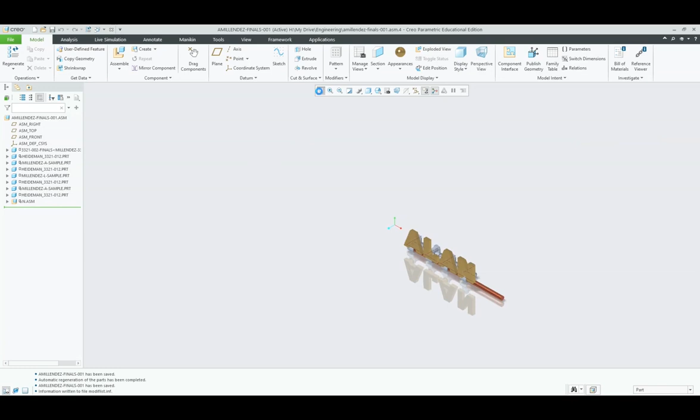This is what we are going to do for our finals. We are going to assemble our name in Creo, and we will create each of these letters as a part, and we will assemble them using the assembly feature in Creo.

So for our finals, you will have to do your name or your nickname, and you're going to need to do three unique letters. So if your name is Alan, you will have to do letter A, letter L, and letter N. If your name is Bert, you have to do letter B, letter E, letter R. Okay? You can do the fourth letter or fifth letter if you have more time, but the minimum would be three unique letters.

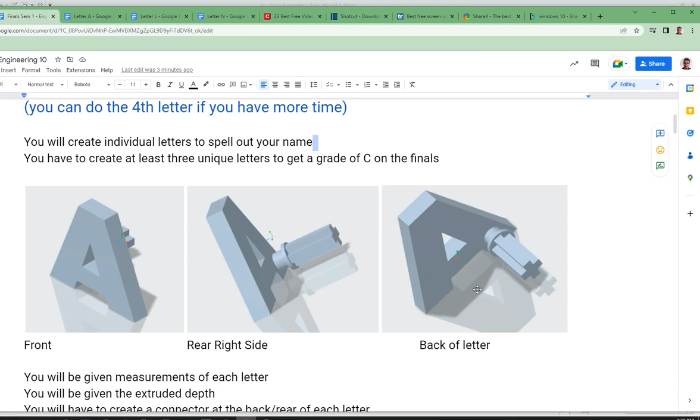Okay? So when you do your letters, you will have to do them in 3D, and you have to put a connector at the rear right side. So rear meaning back, on the right side, you must have this. So here's the back of the letter. If you look at the back of the letter, this is the right side, and that's where you're going to put the connector.

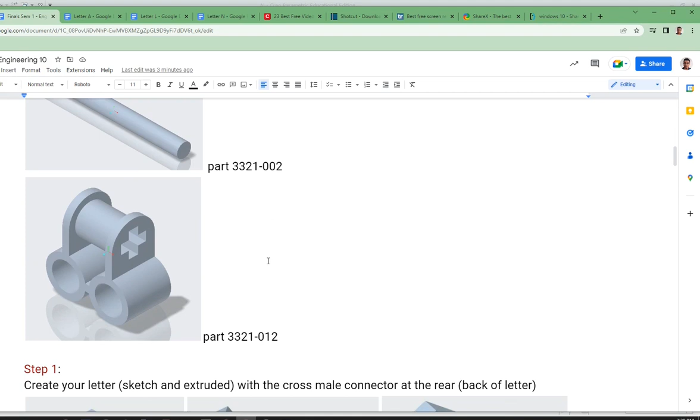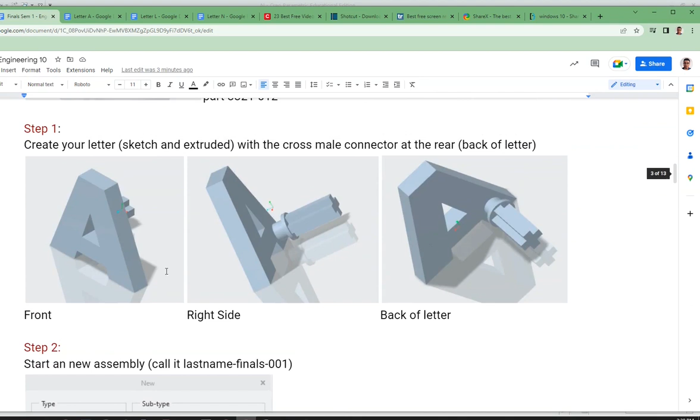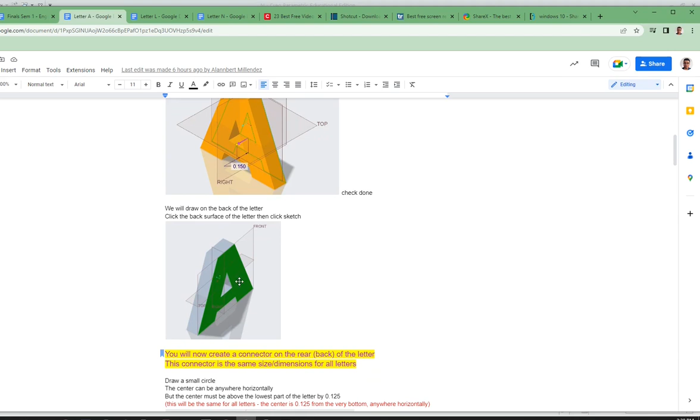Okay. So for your letter A, I gave you all the dimensions that you need to construct letter A. You will have to extrude that to 0.150. And then when you're done, you're going to use the rear side. So this is the back side of that letter. And on that back side, you're going to create a sketch, and then you're going to create a circle with a diameter, not a radius, but a diameter of 0.15. The center of that circle is 0.125 from the very bottom of the letter.

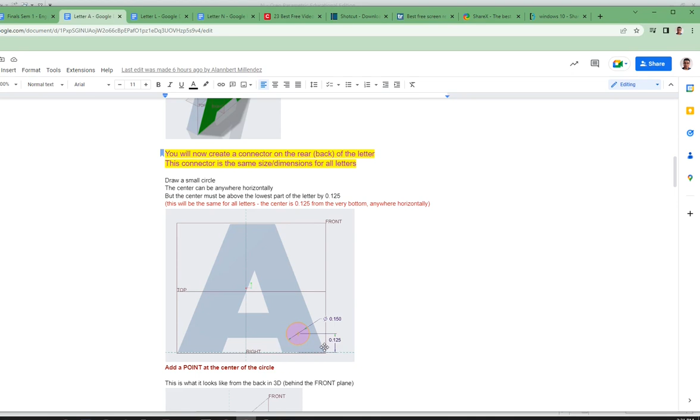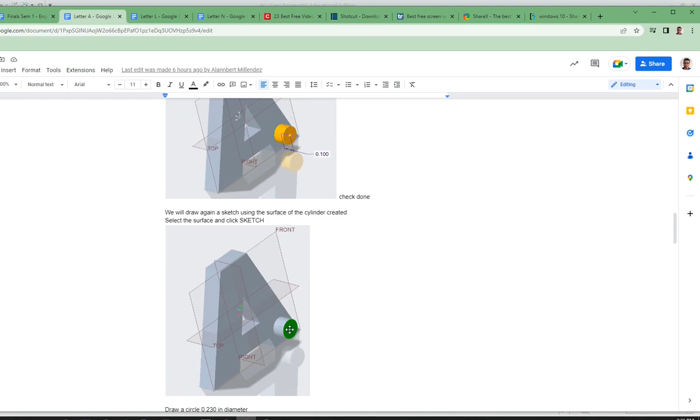At this point, you will also put a point at the center of this circle. And then once you have that circle and that point, you will extrude that to a 0.10. Okay. And then you will select that face after the extrusion. You're going to select that face so that you can do another sketch, and you're going to draw another circle that's bigger. The diameter, not the radius, but the diameter is 0.230. So it's bigger than your first circle, and you should be using the same center as your first circle.

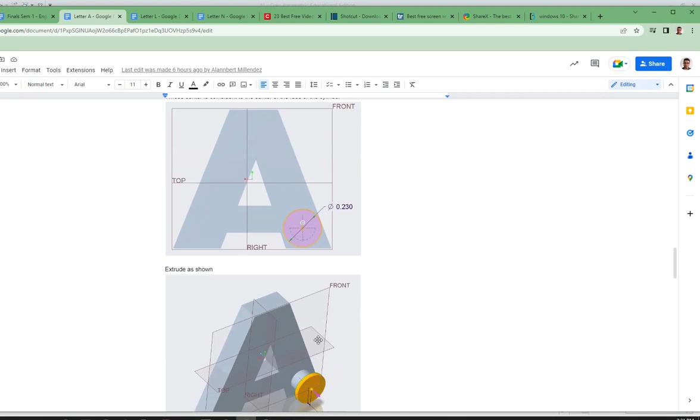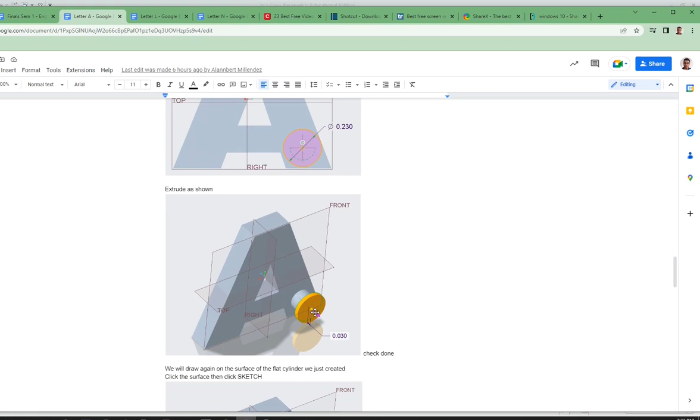Okay, so now you're going to have that second circle that's bigger, but you're only going to extrude that to 0.03. So the first smaller circle is longer, and then this one is shorter, so it's a flat image. And then after you've done your extrusion, you're going to now select this new face, and then you are going to insert your cross. So the cross section that we did back when we did all our parts, you will do that again. If you don't have that, then you have to draw this cross.

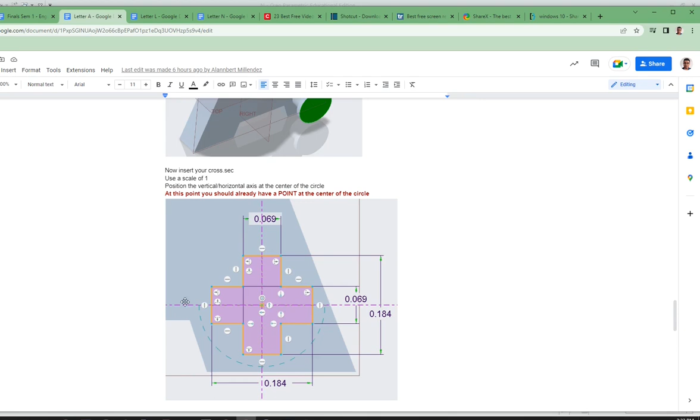Here are the dimensions. Make sure that the axis of the cross, the center of the cross, is at the center of that last circle we did. And then you're going to extrude that to 0.40, and that's what you're going to have. And then you're going to check your volume if you got it correct. Okay, so if the volume is correct, then you did everything correct. And then you will now go to your next letter.

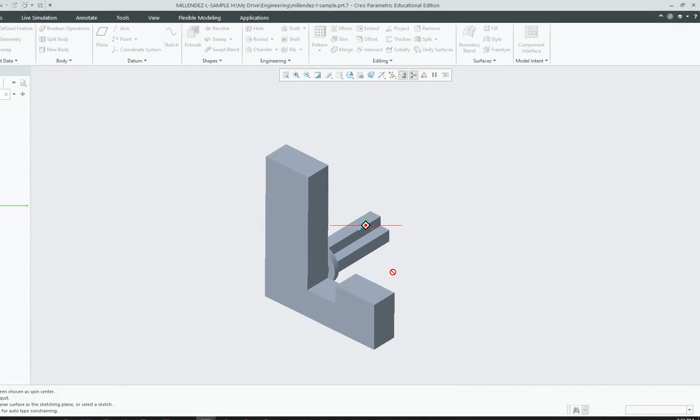Each letter will have to have this connector. Okay, so if your next letter is letter L, then you're going to have letter L also with a connector on the rear right side. Okay, there you go. If your next letter is N, then again you have your letter N, and then you will have your cross connector. Okay, so that's the first step.

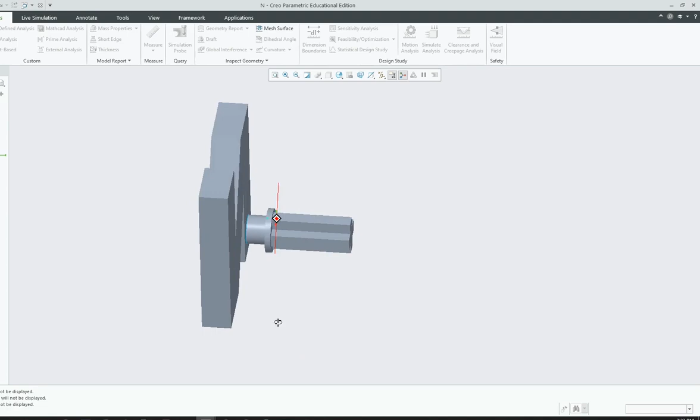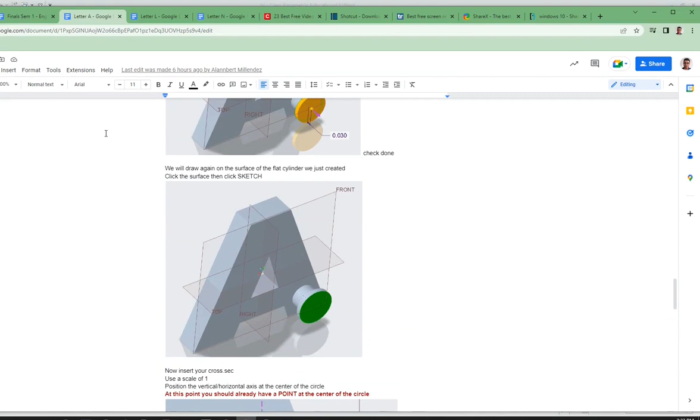You're going to draw or create a 3D of each of the letters. Minimum is 3, and that's gonna give you your passing grade. And then we're going to assemble them after we're done. Okay, so I have given you the dimensions for your letter A. If your next letter is L, you also have the dimensions for letter L. You're gonna extrude that again.

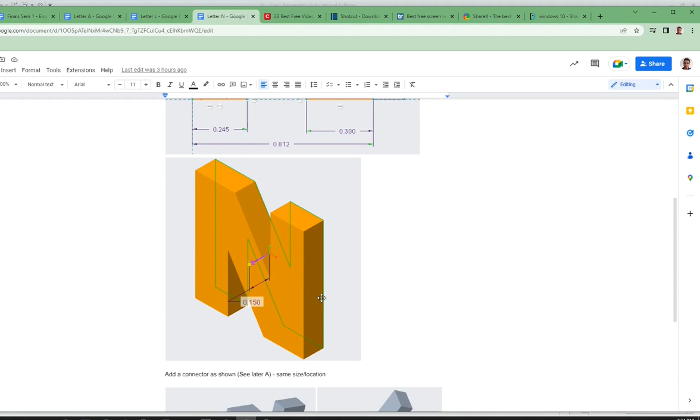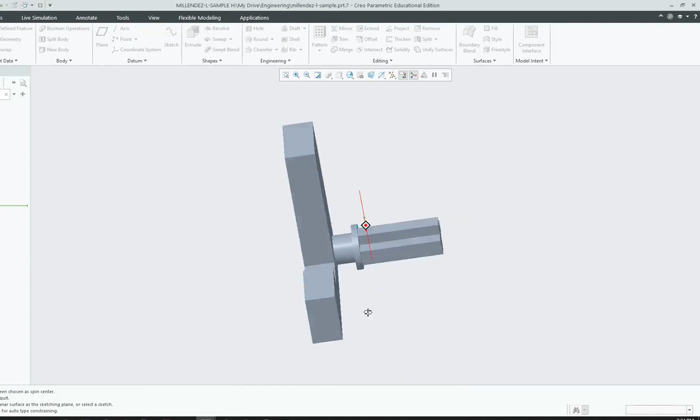And letter N, I'm going to give you the direct dimensions for all the letters, the minimum dimensions. You can create them, and then you should always put a connector on the back, rear, right side of each letter. Same dimensions as you've done for letter A, exactly the same. So all of the letters will have a connector. That's for letter A, letter L, and letter N, minimum of three.

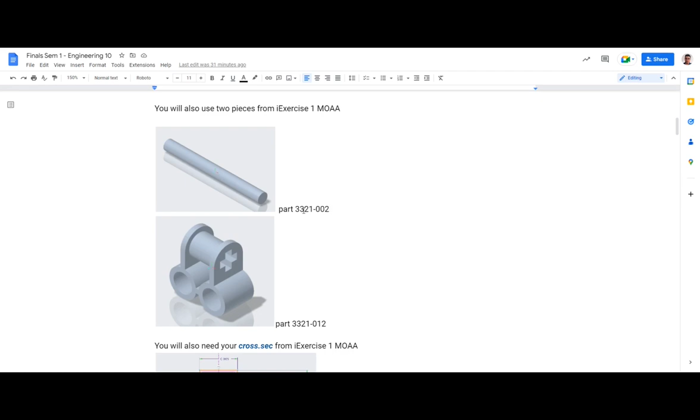Just to follow up on that one, we are going to use parts from our iExercise one from the MOAA, part 3321-002 and part 3321-012. We will also use cross.sec, which is one of the first sections that we did from one of the very first parts that we did in iExercise one.

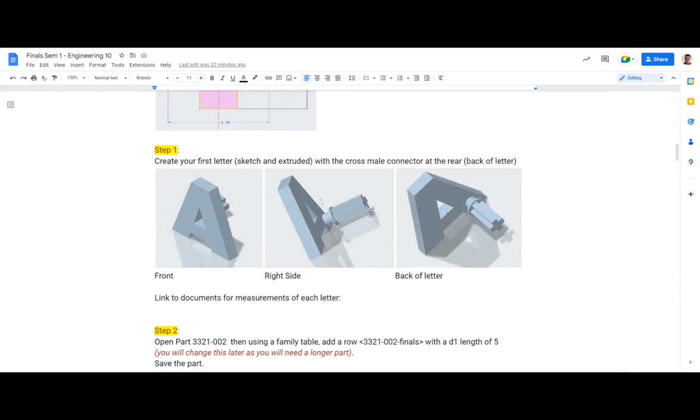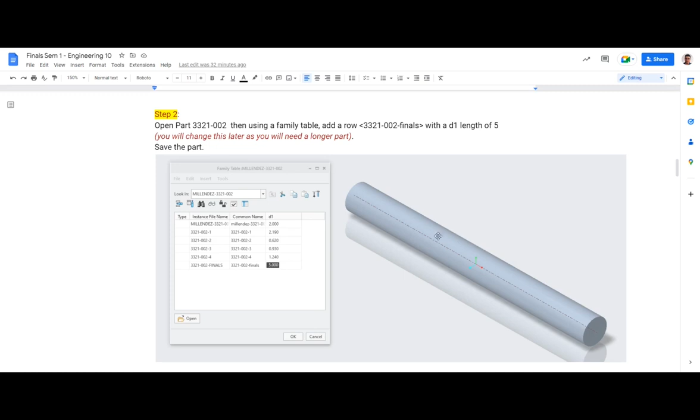So again, you're going to create your letters, put a connector, and then you will open up part 002, and you will create a new row using family tables, assign that row a distance of 5, and you will go back because 5 may not be enough for your name. So you're going to create a new assembly.

Make sure it says assembly, and you name it using your last name dash finals dash 001. The first part that you're going to add is part 002, and you're going to use that new family table row that we created.

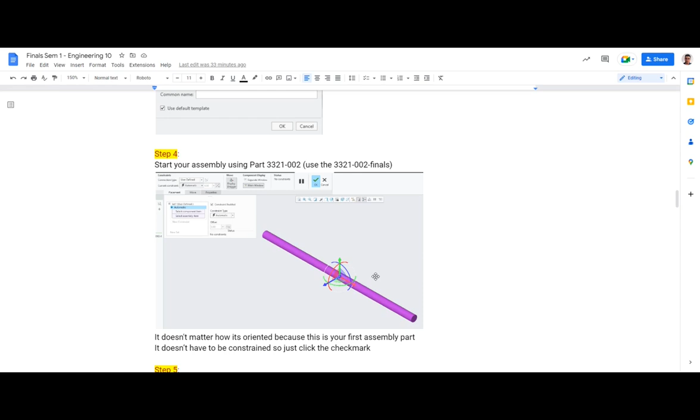It doesn't matter where you orient that, because that's our first part. So all you do is click the check mark, and then you're going to add a new assembly.

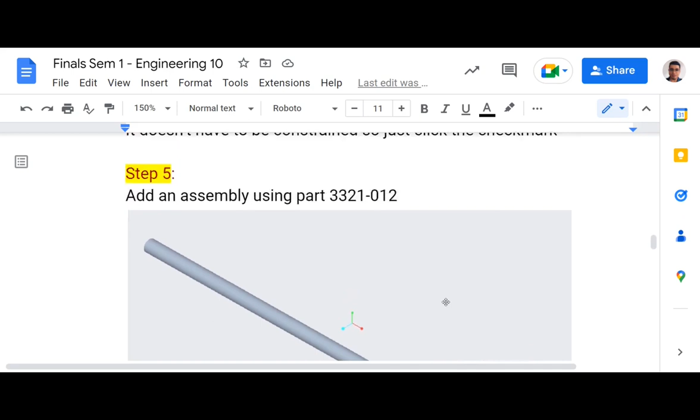You're going to add your 012. So 012 would be your connector from what we did on the MOA or the assembly. So that's 012. After that, you will align that to the left end of the 002 part, the rod.

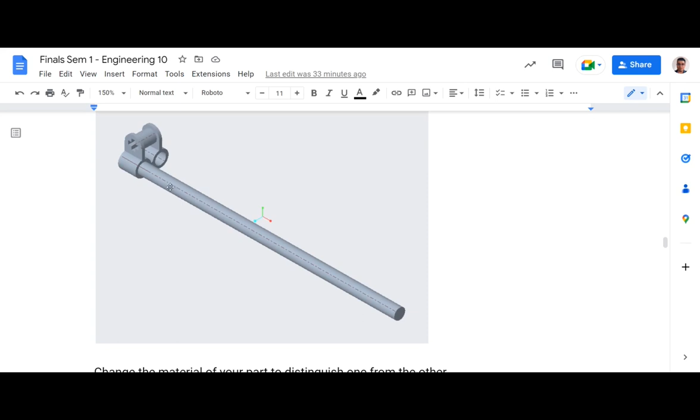And then you can actually change the color of this material by going through the appearance and then selecting a color from this list. Let me show you how.

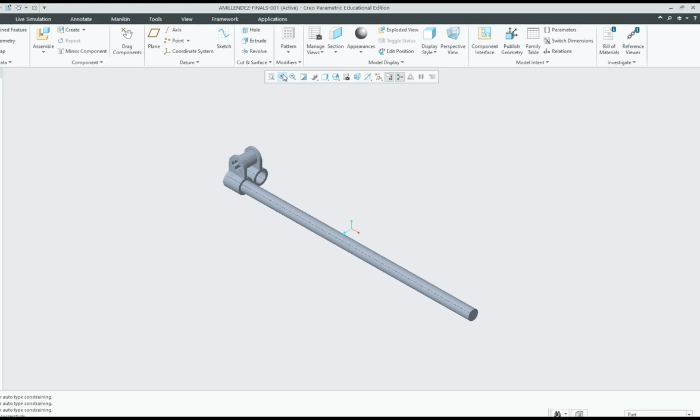Now you can see that the parts are aligned. So if you zoom closer to this area and turn that around, you can see that part 02 and part 12 are aligned.

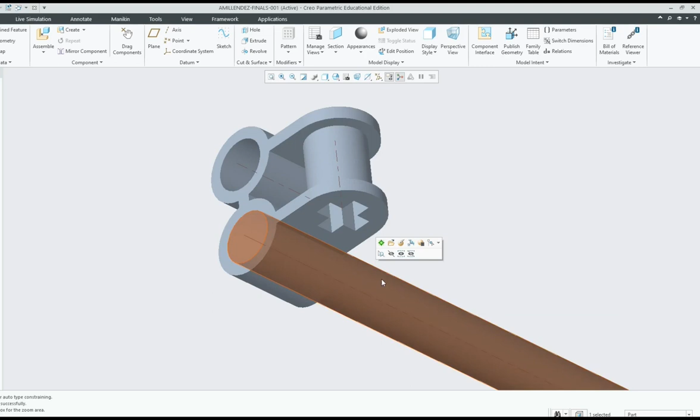Also, you can change the appearance of the parts by putting colors on them. To do that, you change your selection to part. Select, let's say, the rod or part 002. And then over here up on the ribbon, there's appearance.

And then you can select your own colors here. For example, let's select this one. And then it would now change color. You can see the difference that they're aligned, it's flush in the face and everything.

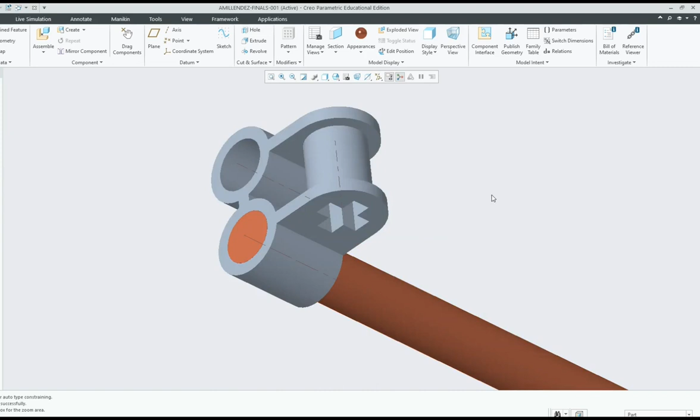You can also change your view from standard shading to shading with reflections, and it should just give you a more realistic effect of your part.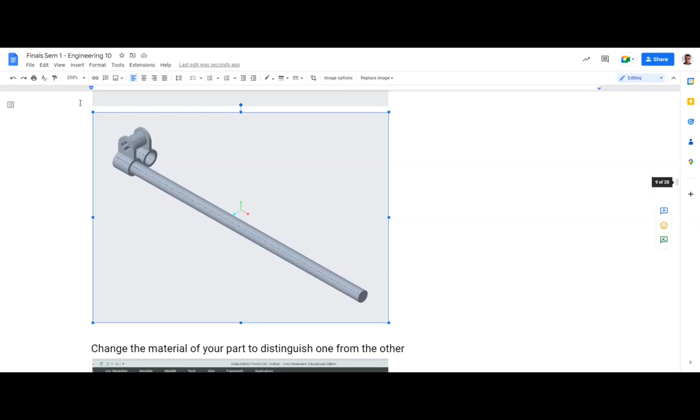Once you have changed the appearance, go ahead and click save, and you're now ready to go to the next step, which is adding your first letter.

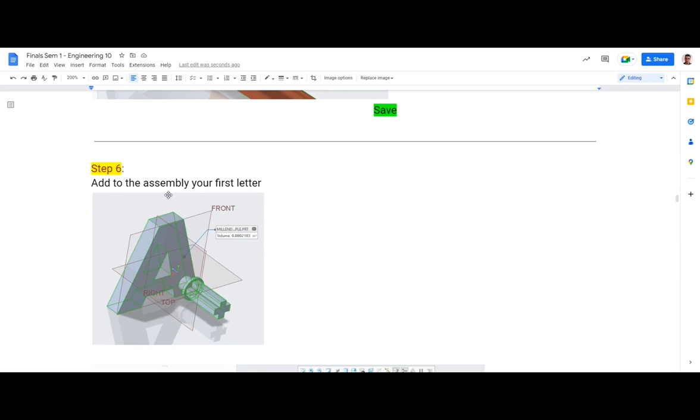In my case, this was going to be the letter A, and remember that the letter A and all letters have a correct volume depending on the letter, and it has these connectors found on the right rear of each letter.

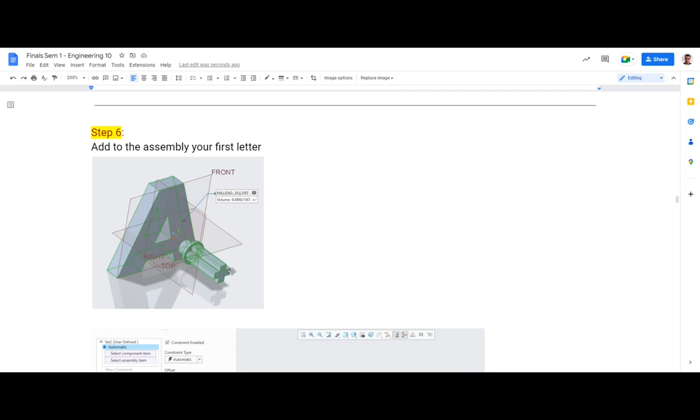When you place it in Creo, you have to place it and put constraints so that the connector will align to the cross hole of part 012, 3321012. This is actually the essence of the finals, is to do your assembly.

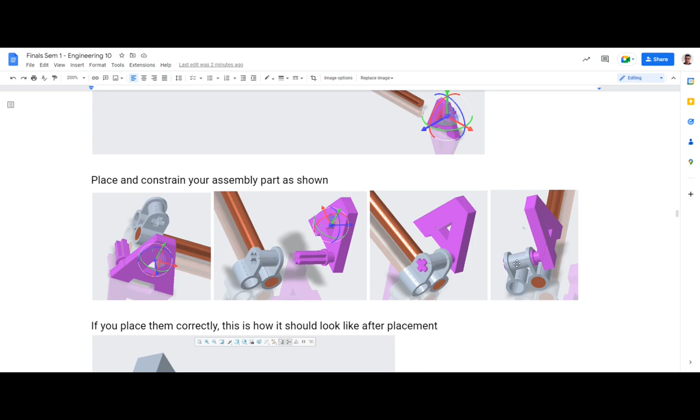So connect it and then make sure that it inserts correctly. There will be an extra piece sticking out, and the 012 3321012, this gray piece, and the letter should be flushed on this surface.

And when you place them correctly, when you check the green check mark, this is how it should look like. You can change the appearance again, just like I showed you before. And the last thing you should be doing is checking for a global interference check.

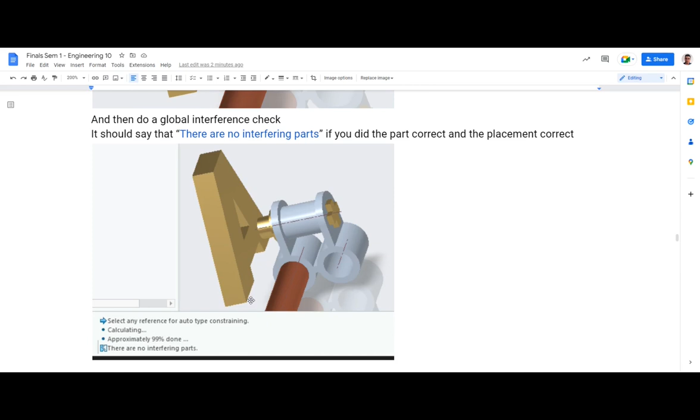It should say in the lower left corner that there are no global interferences, or no interfering parts. When you confirm that, you can click save, and this is how it should look.

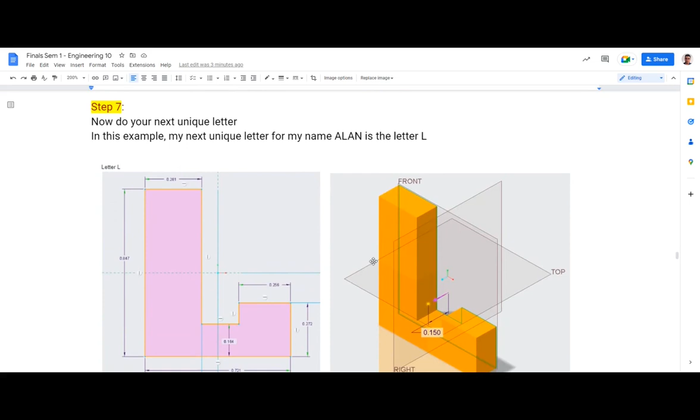The next step is to create your next letter. In my case, it's letter L. I'll give you all the measurements for each letter. You extrude that letter again, and from the right rear of each letter, you create the connector just like you did for letter A.

Now, there's a circle on this connector, and the center of that circle is always going to be 0.125 from the very bottom of each letter. That's always the case.

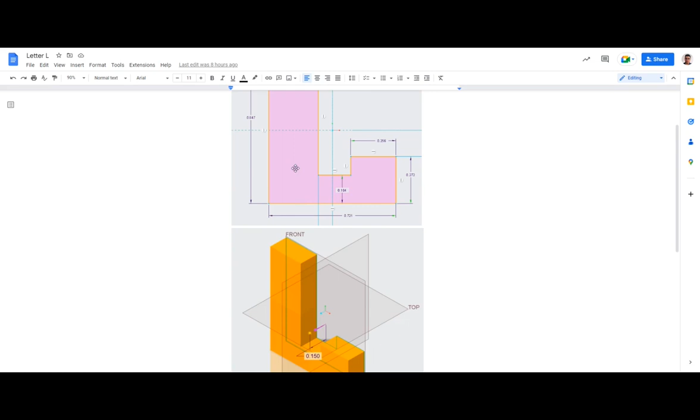It doesn't really matter where the circle would be on the left and right, but the circle on the rear face—not here, this is the front face, so the rear would be here—it should be 0.125 from the very edge of each letter.

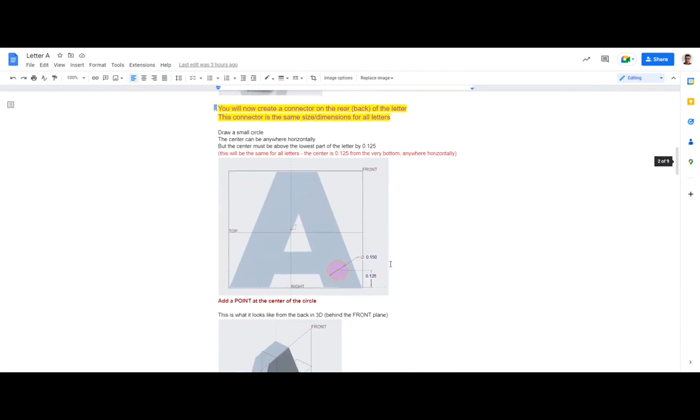I showed you how to do this on letter A. You have to draw a circle on the right rear side, then put a point. You can see the circle and the point are 0.125 from the very bottom of the letter, and then you extrude that again to 1.0.

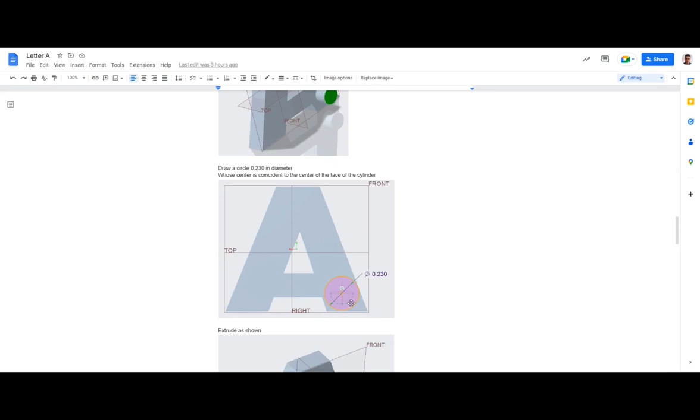Then you create a new sketch using the surface of that extruded cylinder. You create a new circle with a diameter of 0.230—diameter, not radius. They must be concentric, using the same center. Then you extrude that.

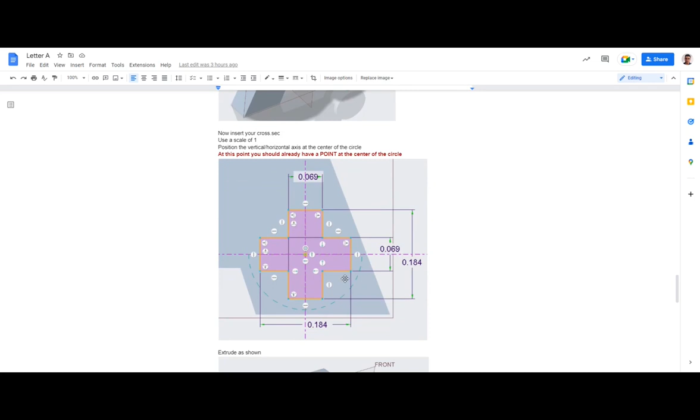Extrude to 0.03. Then you create your next, or last, sketch using that surface, and import your cross section, or draw it again if you don't have one, and extrude that to 0.40. Then when you click OK, you can check the volume.

That's how each letter should be. So now you're done with your letter L.

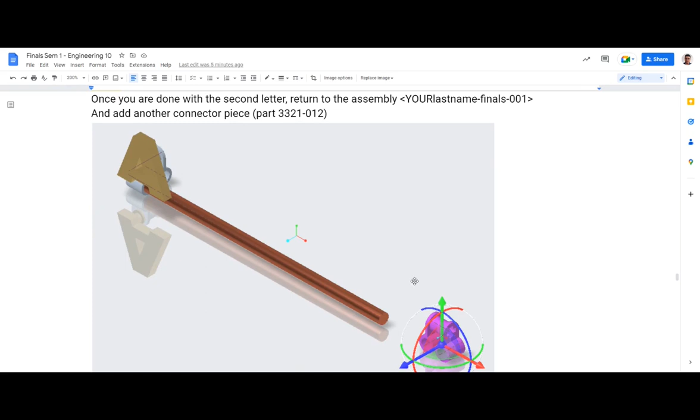When you're done, go back to the assembly and place not the letter first, but another part, 3321012, which is this connector, and do some placement and constraint. For now, you can just put it anywhere in the middle of this rod, which is 3321002. Once you have it there, the next step is to add your letter.

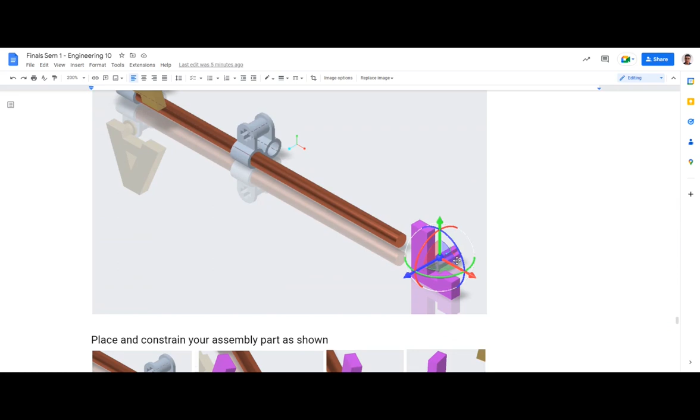Remember, there's a connector here. You'll put this letter and use the back connector to put it in this hole. You can move it here, do some constraints so they're aligned, and then have it flush on the surface, with something sticking out in the very back end.

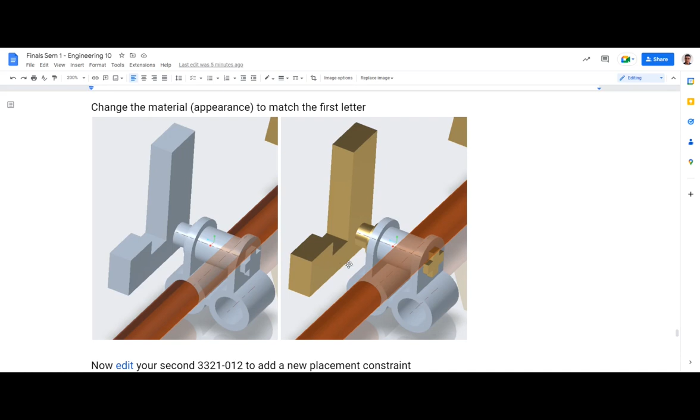When you're done, you can change the appearance again, just like we did with letter A. Now, because we placed this connector in the middle of part 002, which is this brown rod that I have here...

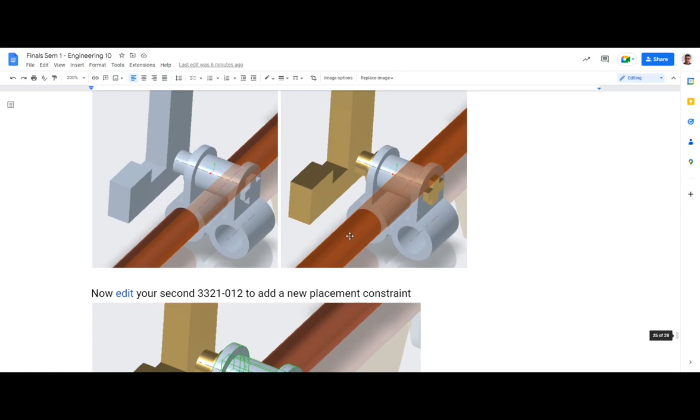You will have to edit the definition of 012, and this letter L, or your second letter, will disappear temporarily.

As you put a new constraint, you want to use the inner surface of 012 and the edge of the first letter—in my case letter A—so that they have an exact distance of 2.0. You want the distance between this surface and that one to be 2.0.

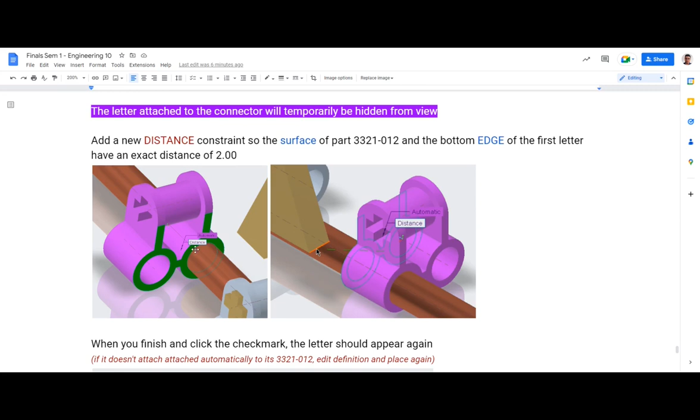Let me highlight that. You want that to be 2.0. Once you have that, when you click the check mark, the letter should come back and attach to this connector. If it doesn't, you can just edit the placement again.

Now you're ready to put in your next letter. In my case, because my next letter is the same as my first letter, A, I don't need to create it—all I have to do is place it again.

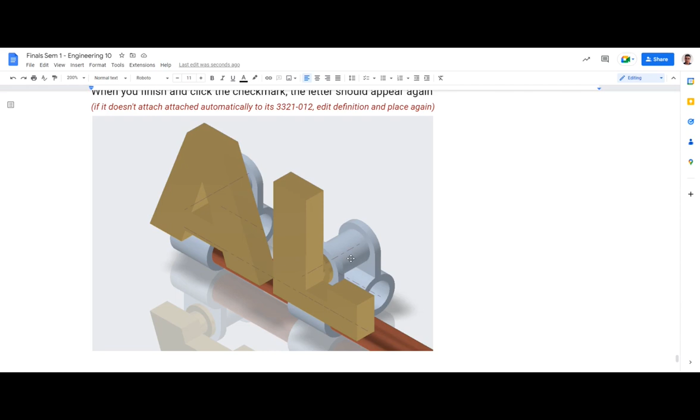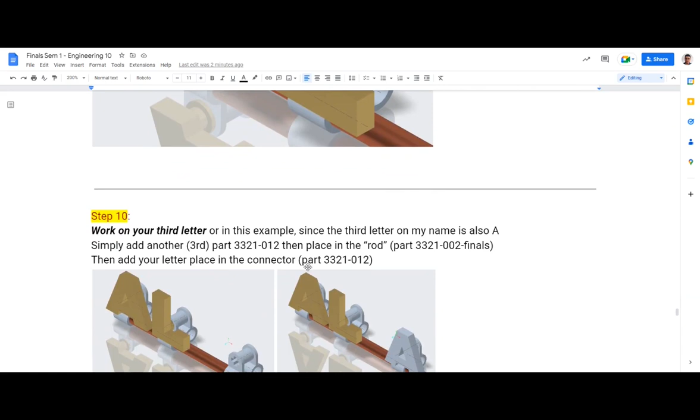We just finished putting in our first two letters. I'm going to now work on my third letter, but because it's the same letter as my first one, A, I'm going to simply do the same things I did before.

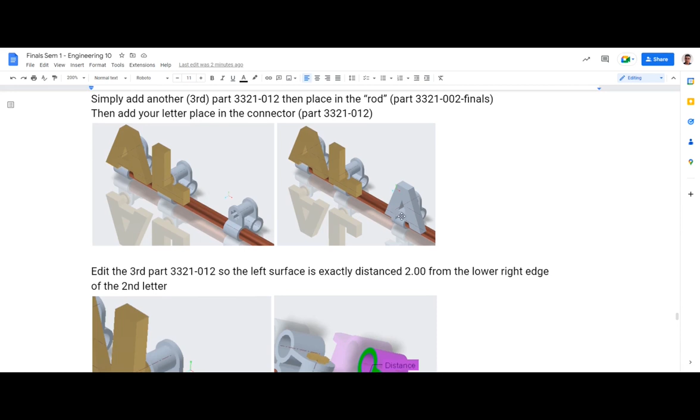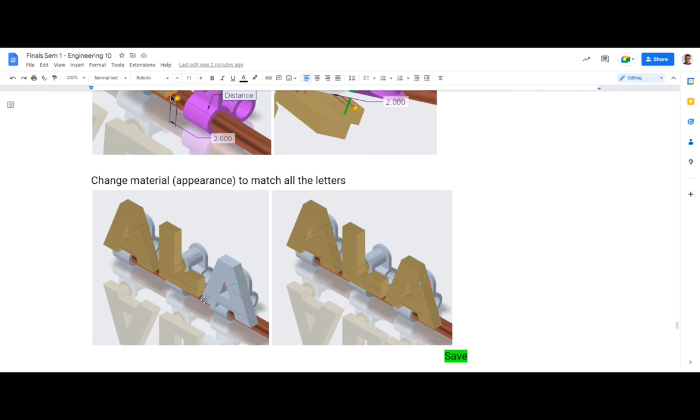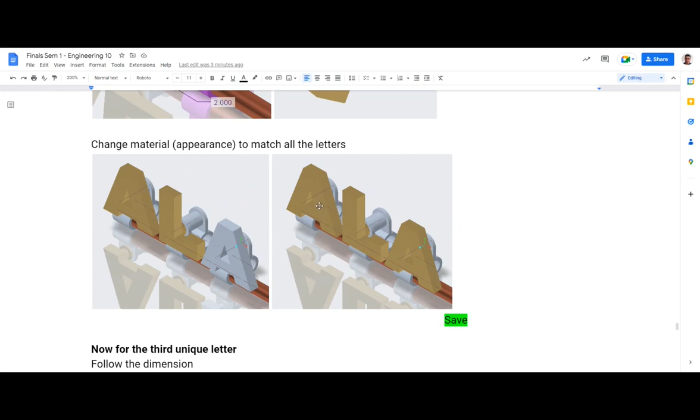But if you have a third unique letter, like letter N - letter A is a unique letter, L is a unique letter, this is not a unique letter, they're the same as the first one - so you are required to have three unique letters. So A, L, and then this is my third letter.

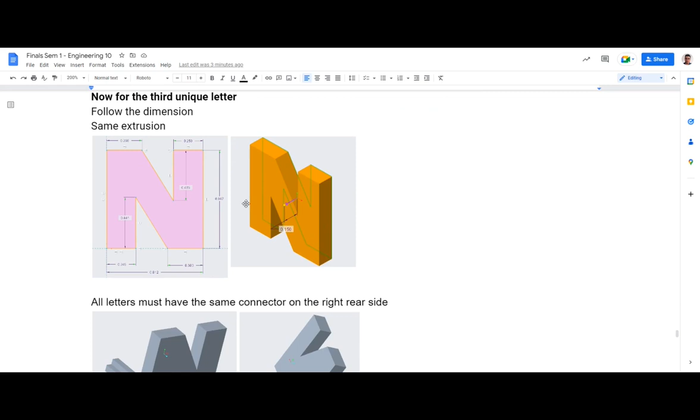I will give you all the measurements of the letters. You will extrude it to the same thickness, 0.15. You will put in the same connector on the same location. Remember, the center of this connector is 0.0125 from the very edge of each letter. Once you have that, you're now ready to do the same steps.

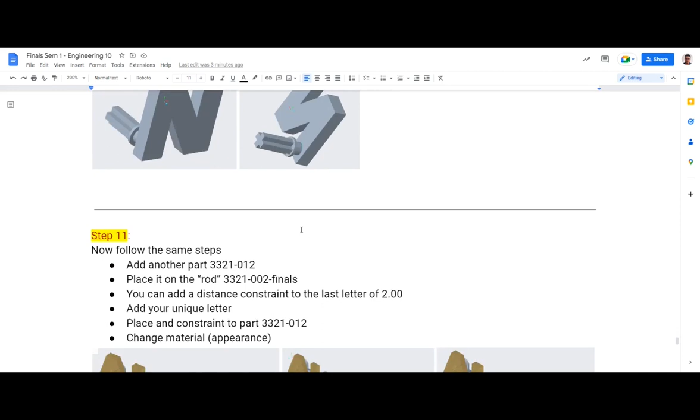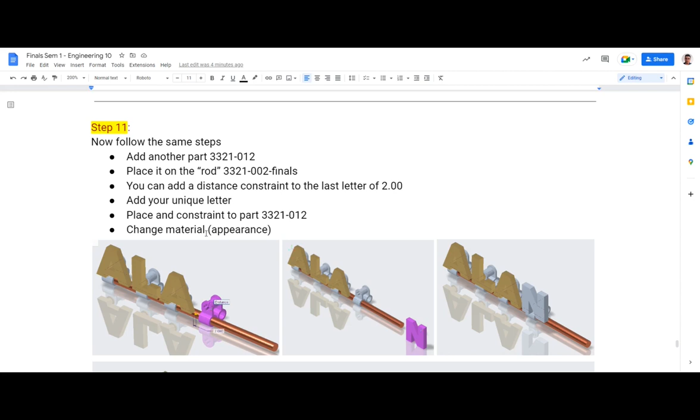You're going to add another 3321-012, put it in the rod, and at this point you can actually put a distance constraint before you even put the letter, or you can do it after you put the letter. It doesn't really matter. So add your unique letter, then place a constraint on it, and once you put it in there, you can see that they're almost equally spaced.

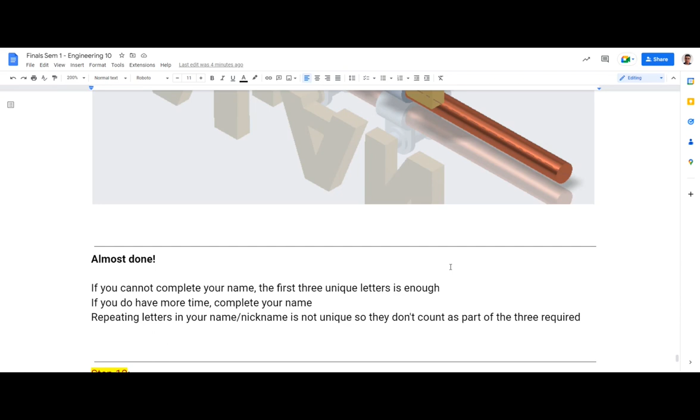Then all you do is change the appearance on it so they're all the same, and you are almost done with your work. If you have more time, complete your name. But if you don't have time, the minimum is three unique letters. But if you have time, like some of you finish really early, then try to complete your letters.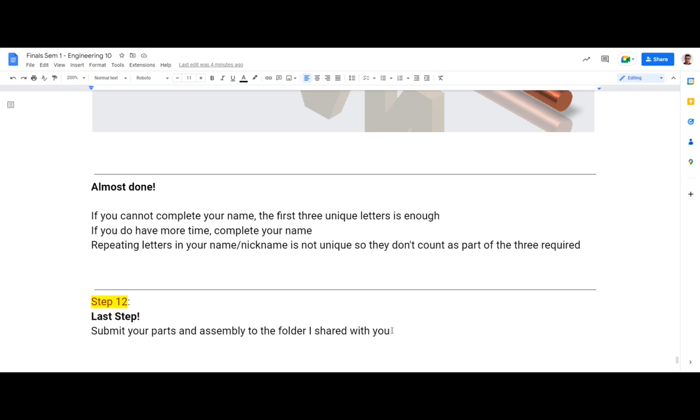The last part that you're going to do is submit your part and your assembly to the folder I shared with you. So I did share some folder with you, and I'll try to show you how to do that in this video.

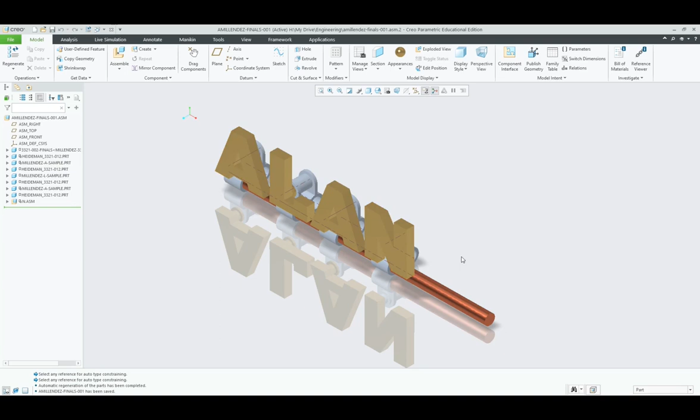Okay, so now that you're done and you have all the letters of your name on your assembly, you must have three unique letters on it. So I have letter A, I have L, and then I have N. This second letter A is not unique because it's the same as this one. So you must have three unique letters. Once you've done that, you can see it's all connected.

And it's okay if part 002 is longer, that's fine. We can change the length of that one on the family table. But once you're done with that, go ahead and click save. It might ask you to regenerate first, so click regenerate before you click save. So click regenerate, then click save.

Then you will see that all the files that you inserted are going to be on your model tree. So this is the assembly, this is the long brown rod there, part 002. Then I have my letter A, letter L, I have my letter N here, I have part 012. So how many parts did I use, or how many pieces of files did I have?

I have 1, 2, 3, 4, 5, and then 6. So I have 6 - 1, 2, 3, 4, 5, and this whole assembly is 6. So I have 6 pieces to submit. You might have more than 6 if you have a longer name and more time. And if you didn't finish, you might only have one letter, then so be it. That's what you have.

So once you're finished, go ahead and regenerate and save. Then you will now have to do the last step, which is submitting your document. So if you remember, I gave you a form where I wanted to collect your last name and first name, and that is so I can create a folder for each one of you.

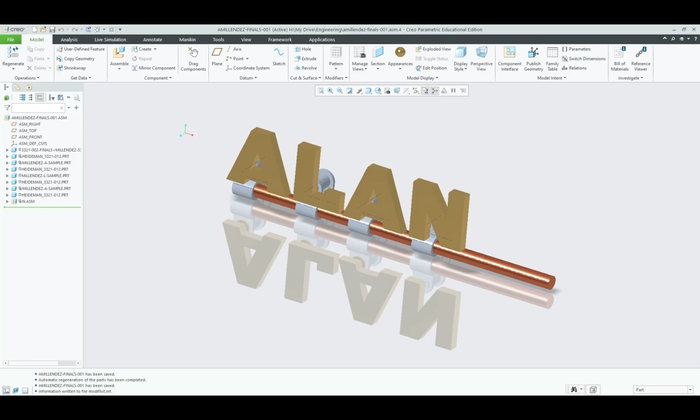Now if you're not sure which one, I told you that you can submit multiple copies of those files. The more files you submit, the longer it will take you to upload them, and do not leave the class until all of this is checked green.

So you are now done with the finals. That's how it's done. And I'll put a video on how to do this again in the bottom of your finals.